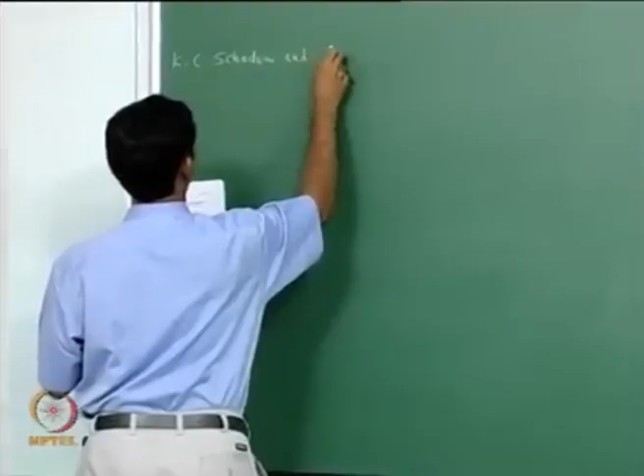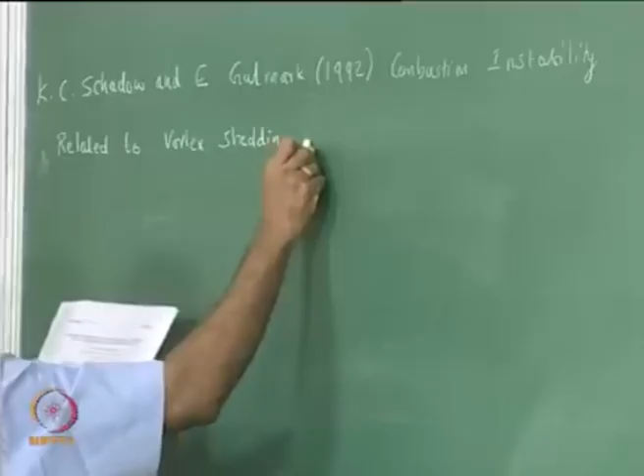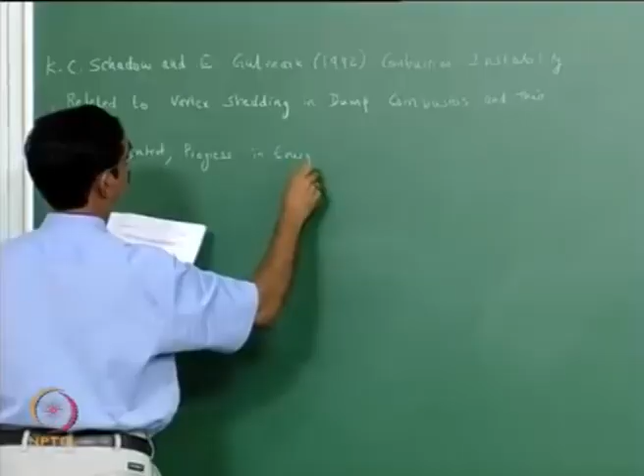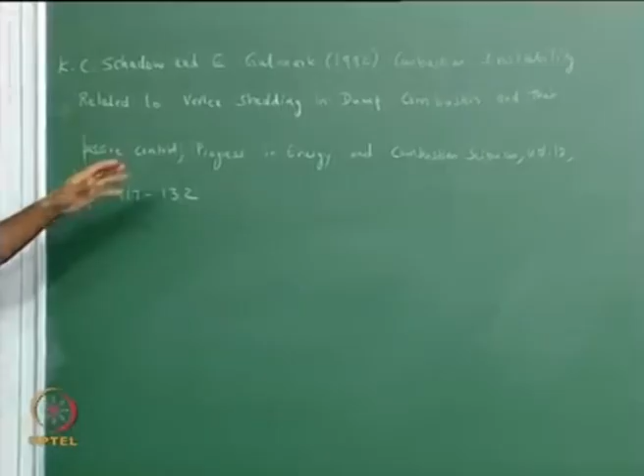So I will give you two nice references. We can download them from ScienceDirect. This is somewhat old, 1992, but it is a very nice reference written by Schadow and Gutmark, titled Combustion Instability Related to Vortex Shedding in Dump Combustors and Their Passive Control, in the journal Progress in Energy and Combustion Science, volume 18, pages 117 to 132.

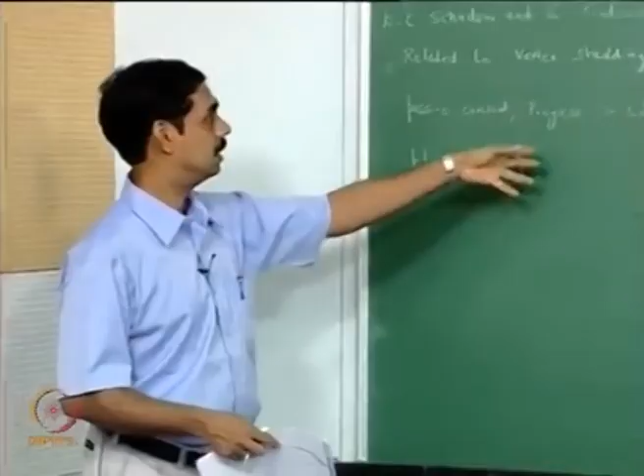I must say a word about this journal, Progress in Energy and Combustion Science. This is a journal which publishes exclusively review articles, and there are no regular papers. Each article gives an overview of the recent development of the subject, in the last 5 or 10 years, and it gives a large number of references. For example, some articles give 50 references, some give 100 or 200. So if you are starting out in a new subject, the first thing to do is perhaps look for a review article on the topic, and in combustion these are all published in this journal. That is a good way to start.

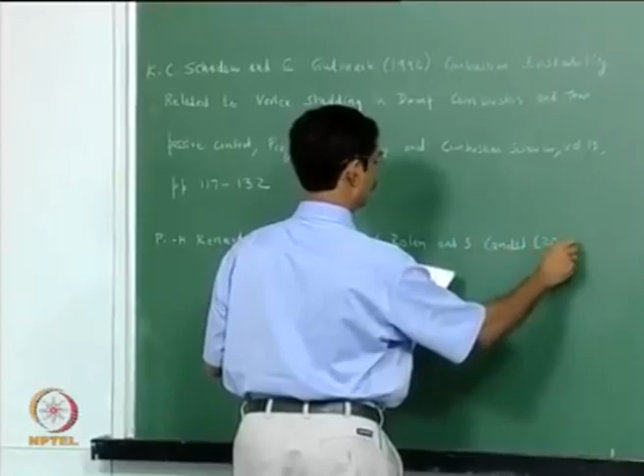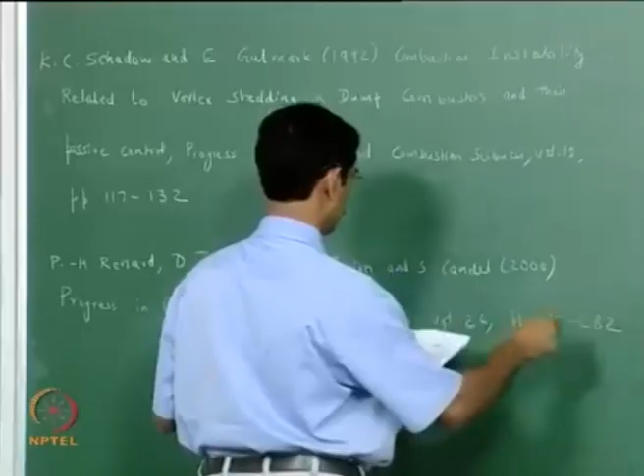So this article gives a good overview of the subject. I will give you another reference, approximately 10 years later, again from the same journal. Dynamics of flame vortex interaction. Here the article is focused on how the flame vortex interaction happens, whereas the other one emphasizes combustion instability itself. So please read these articles.

So I am going to discuss qualitatively what happens, because in the context of a class it is not possible to make a very simple mathematical model. To capture vortex shedding, you have to solve with CFD, and I think that is beyond the scope of the class, but I will give you some highlights of the phenomena. I will first draw a schematic or a cartoon of how a flame would look.

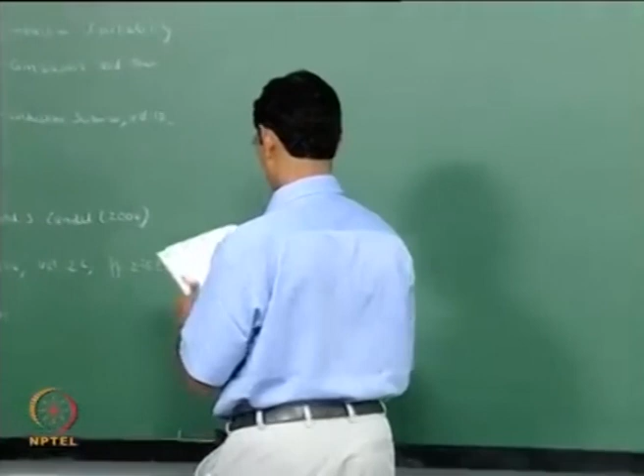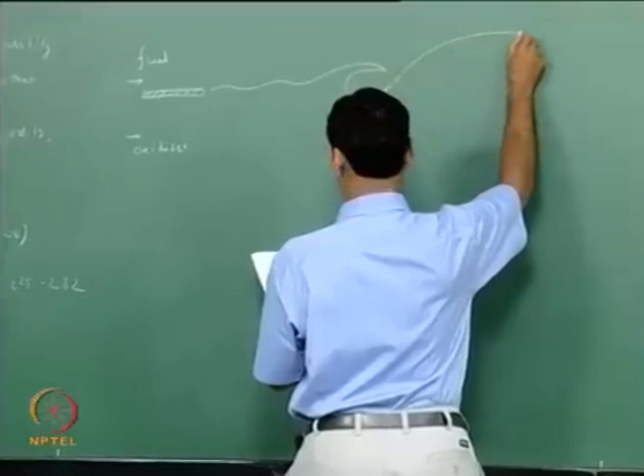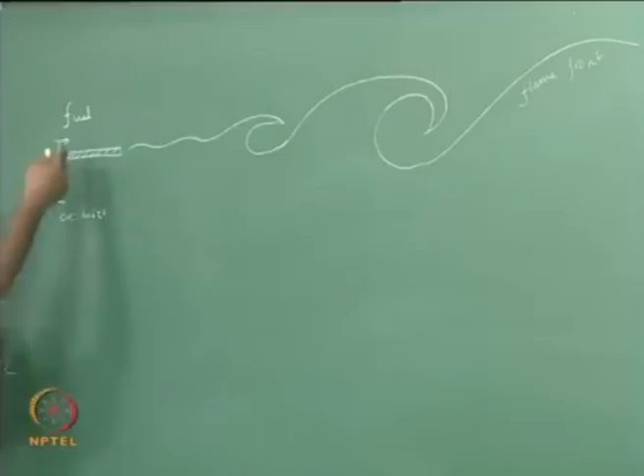So let's say there is a splitter plate here, and you have fuel coming from this side and oxidizer here, and you would have instability waves like this. This would probably be the way the vortex sheet would look, rolling up and so on, and this would be the flame front. And you can also have a situation in the same configuration where you have fresh gases here

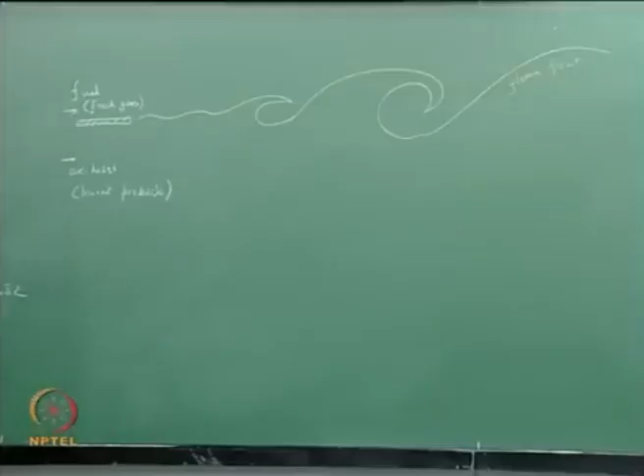and burnt products here in the recirculation zone, and you can still have a similar roll up, and definitely the roll up is a periodic phenomenon. So naturally anything periodic means there is a possibility that it will give rise to fluctuating heat release rate, which, if it can be in phase with the acoustic field, the pressure oscillations, can drive the pressure oscillations. So that is the idea.

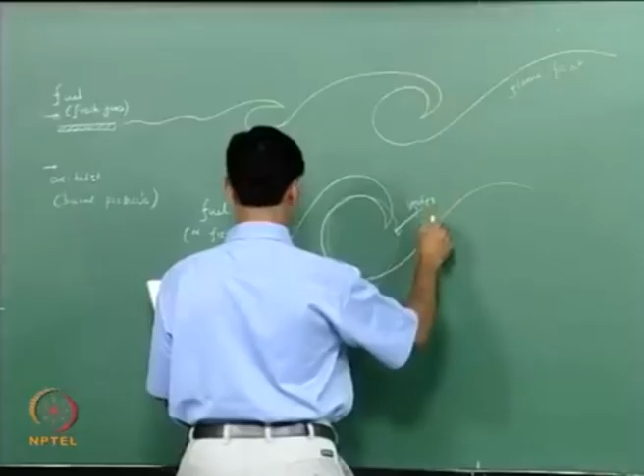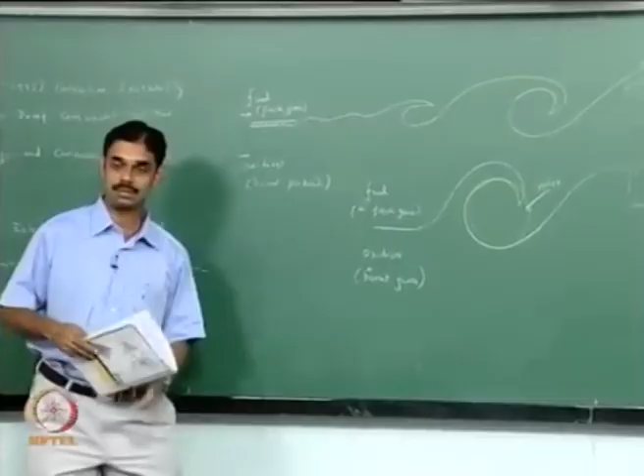Now I will redraw this cartoon, zooming in on this region. So this again is fuel, or it can be fresh gases also. I can have oxidizer here, or I can get the same picture when I have burnt gases, and you have something like a vortex here, and this would be the flame front. So we can imagine that these kinds of situations can arise in a combustor, right? The idea is to have a discussion on what role these things play in combustion instability.

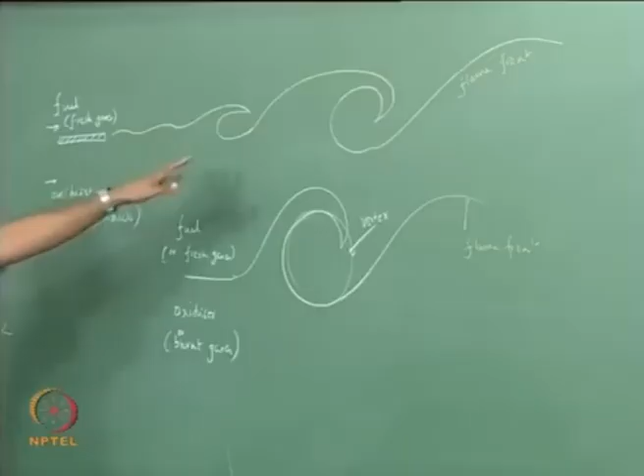There will be a symmetric flame front on the other side. Yes, I will draw that in a second. This is just a very simple situation where you have a shear layer with a splitter plate, like an academic configuration, where they show the vortex roll up. Similarly you can get a flame, and this is just zooming in on this, but in reality, yes, I will talk about it in a few minutes. In reality you can't have a combustor with just a plate; we have to have a combustor to have combustion, and then all those things will be there.

In dump combustors or combustors with bluff body flame holders, vortices are formed in the shear layer between the high speed and low speed streams, let us say at the rearward facing step, or backward facing step, which is called the dump combustor, or in the wake downstream of the bluff body. A bluff body can be used as a flame holder. So the vortex formation is there, and you cannot get rid of it, but neither can we get rid of these generic combustion configurations where the flame is stabilized by some kind of recirculation zone. Why is this recirculation zone necessary to stabilize the flame?

What happens if it is high?

Yeah, okay, so the typical flame propagation velocity, the laminar flame speed, is of the order of less than a meter per second, and even in turbulent flow it will be at most a few meters per second. We want the combustor working with flow at much higher velocities, because the higher the flow rate, the more heat you get out of it. So that is the idea.

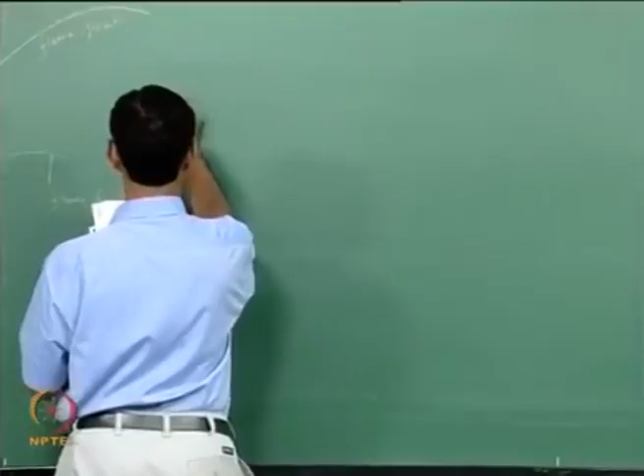So therefore let me show a few typical combustion configurations, so that Derek will be happy that we are looking at practical situations. This is the typical dump combustor. Fluid mechanics people call it a backward facing step, and the combustion people call it a dump. Both are like dumping into a bigger region, that is what it is. So this would be a dump combustor.

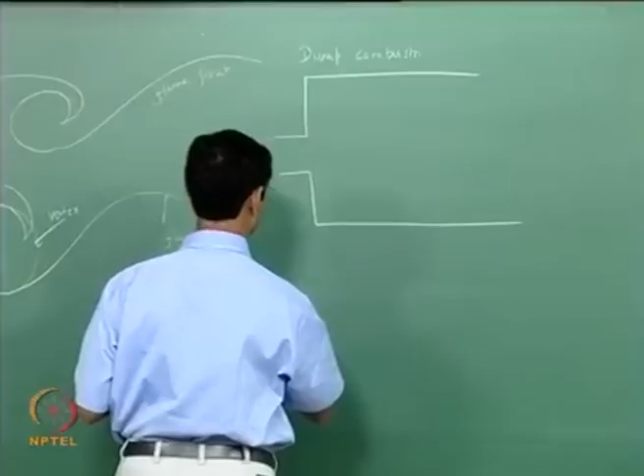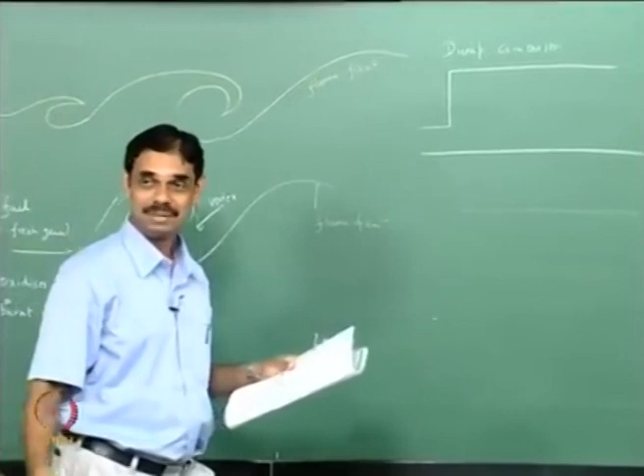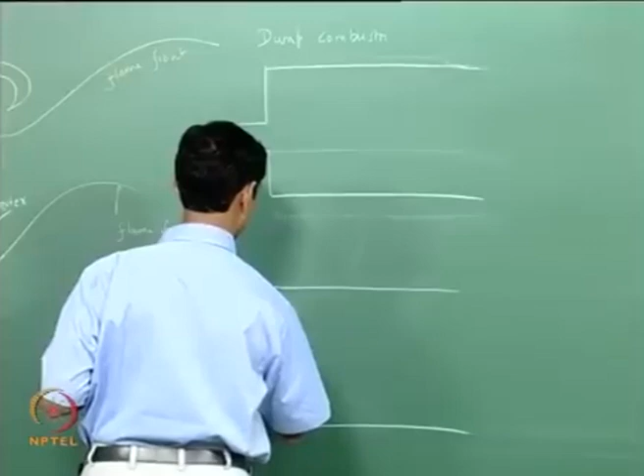You can also have variations of this. If you have a wall like this, let us say I erase this and I have a wall like this, then you have only one side and it will break the symmetry. Such combustors are typically seen in laboratory configurations, but real combustors in the field would be symmetric and usually would look like this. Now I will show you a variation of this. You can have a bluff body here, and that can also stabilize the flame.

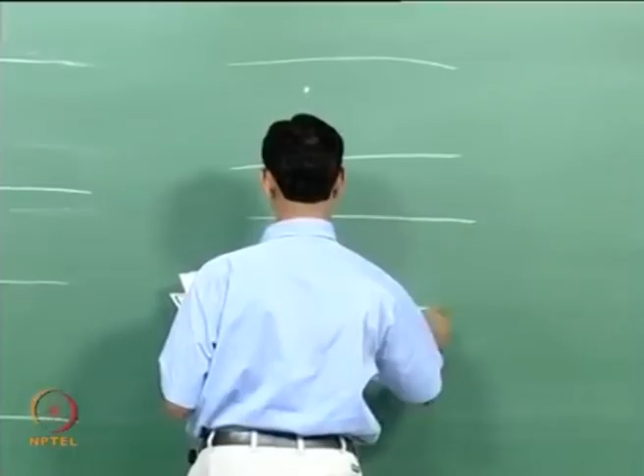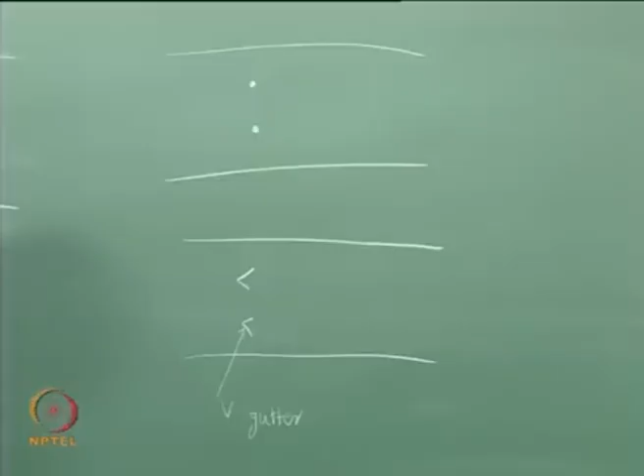Other variations which you would see are some kind of wire or cylinder which will hold the flame in its wake, or what are called V gutter stabilized flames, which are sometimes used in afterburners of aircraft engines. These are practical combustion configurations.

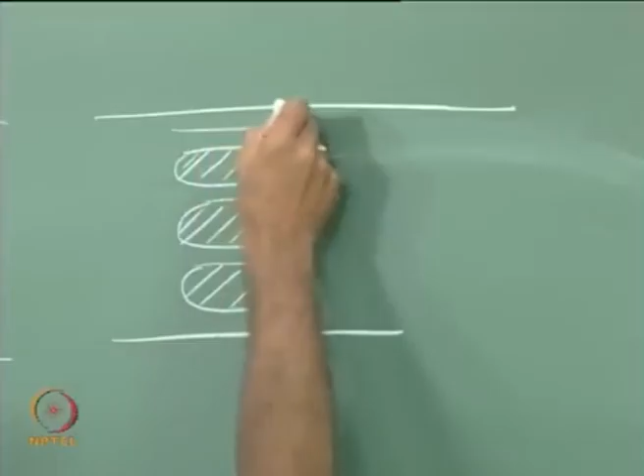You can also have multiple flames being stabilized on some geometry like this. That is another possibility, and you can sometimes see it in domestic heaters. You can also have ramjet combustors which burn solid fuel, the solid fuel ramjet, SFRJ. So sometimes we use a dump there as well.

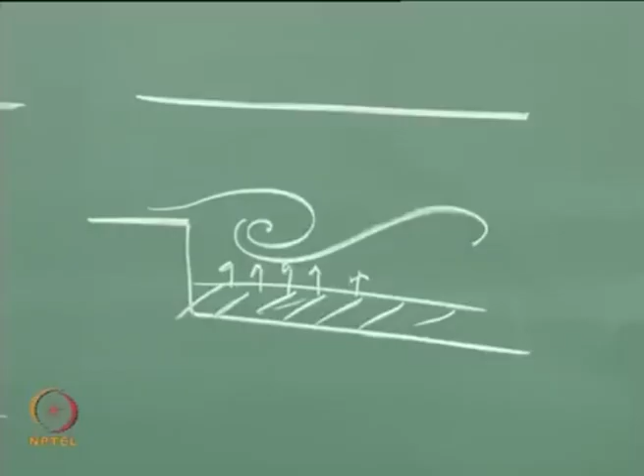So you can have solid fuel burning and pyrolyzing here, and then vortices being formed over that. I am sure you can draw many more configurations. In fact, this paper shows many more configurations than this, but I have just talked about some of the configurations to give you an idea, and you can see those papers for more.

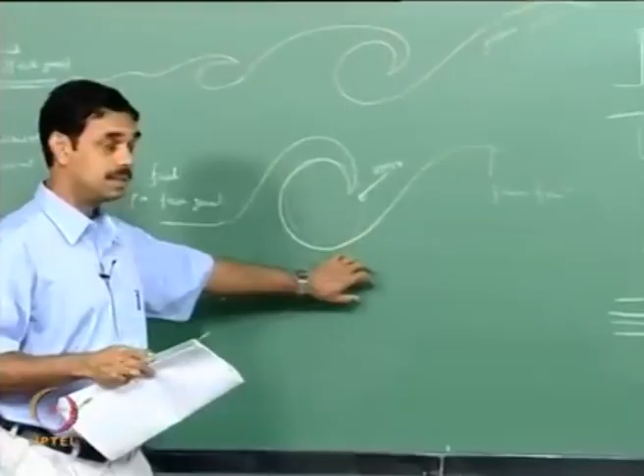I will not speak now about swirl combustors. I will just speak about this vortex shedding and bluff body, but there also there are quite a few interesting instabilities that happen. So now let us take a relook at this picture in the context of these combustors, as Derek was pointing out. I will draw one side, you can draw both sides.

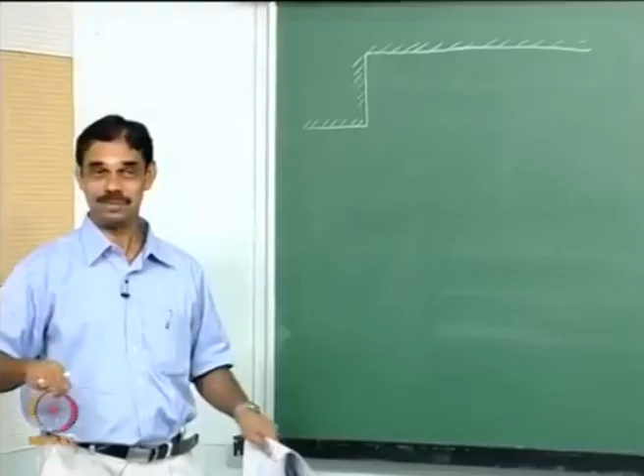This is adapted from the first reference, Gutmark and Schadow. So in reality we have walls, and the walls will also interact with our flame and flow and everything, acoustics, which is something we cannot get rid of. Of course, in the laboratory you can set up a splitter plate in the wind tunnel and have a flame and so on, but in real combustors you have to have walls and they will interact, and we have to worry about the interaction.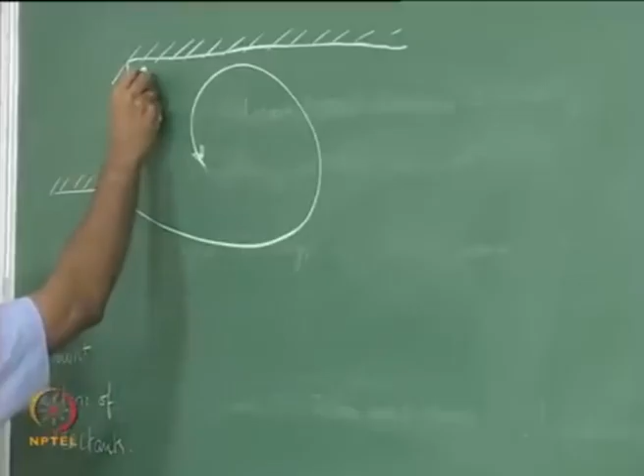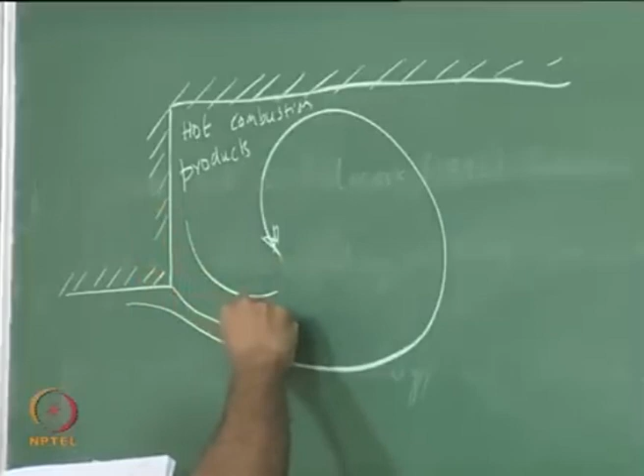So let us say we have a premixed flame coming, so we have unburned mixture of reactants coming here, and we would have some kind of vortex roll up here, and so here we have unburned reactants and there are hot combustion products here hanging around, and that is precisely the reason we have this expansion, so that these hot combustion products will be there, and they will try to get entrained into this, and there will be some kind of interface here.

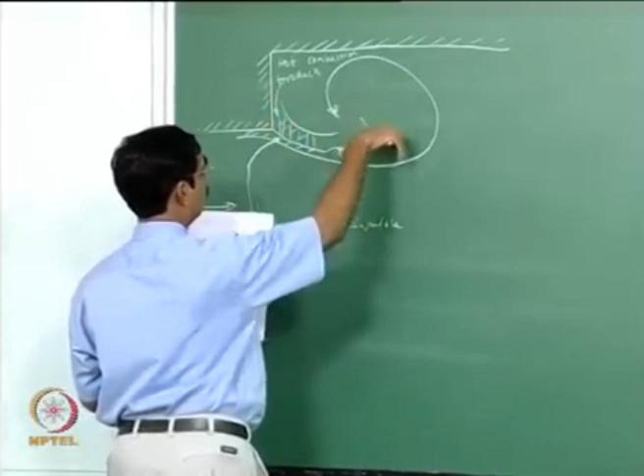So this unburned mixture of reactants will try to get in this way, and the hot combustion products are trying to come in here, and then there will be an interface, and then you will have a pool of mixture which can actually burn in this vortex. Okay, so that is like a cartoon or schematic, and the exact details can change depending on how far the walls are, what is the step height and so on, but this is a basic schematic of the situation that can prevail.

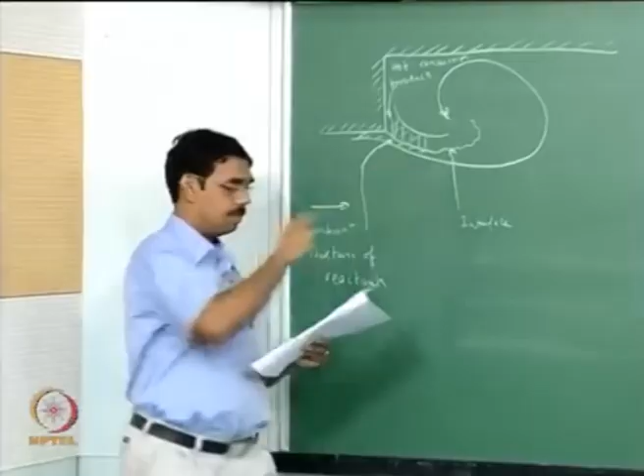So clearly you can see from this that the vortex structure can have a significant influence on the combustion. In the early phase you have unburned mixture on one side and the hot combustion products on the other side, and then you do not have intense mixing and burning, but as the turbulent structures develop and the fine scale mixing happens in the interface, you can have fine scale mixing and burning. So you have a roll up, but in reality that is not the only thing.

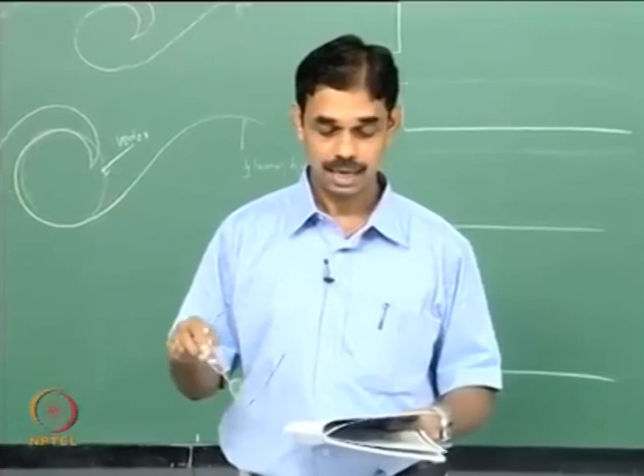You will have interaction between vortices because the shear layer has an instability that will shed at some frequency. Those waves will have some preferred mode of excitation and so on, and then vortices will be shed, and these vortices will actually merge, and then you will probably end up having a lower frequency of the bigger organized structure, and of course this will be obstructed and severely interfered with by the walls, so that the situation will be quite different from a flow from a jet. It will have some similarities, but the wall is interfering for sure, and a large interface between the fuel air mixture and the hot products will develop, and there will be fine scale turbulence which causes entrainment, and so eventually adequate numbers of radicals will diffuse or mix into the stream, and there will be a pool which will suddenly burn.

So this phenomenon will be quite periodic, and it happens cycle after cycle, and of course if you studied the Rayleigh criterion, which says that if heat release rate is in phase with the acoustic pressure, then you will have acoustic driving. So here there is a delay: the mixture comes in here, comes here, and at some instant it burns very vigorously, then again this phenomenon happens, and all the things that we studied about how the acoustic model has to be developed will again apply here, and this time delay between the fluctuations here and the heat release will clearly affect how the reactants are going to burn, whether they are burning in phase or out of phase, and therefore whether they are going to drive the instability or damp the instability.

And researchers have said that, I mean, this is the situation I have drawn for gas phase combustion, but even if you are having spray combustion, the spray will be entrained into the vortex, and of course the situation will be much more complex. If you buy a spray, people say it has an average diameter, but average diameter is not the only thing. You have a diameter distribution, and you have all kinds of droplets, small droplets, large droplets, and the small droplets will behave in one way: they will go very well with the structure, they will almost behave like gas. The large droplets will have heavy inertia, so they will not follow the flow exactly.

Similarly, if there are acoustic oscillations in the combustor, the small droplets will follow the acoustic oscillation very well. So if you have a 10 micron droplet at around 300 hertz, it will fluctuate at, I think, 80% of the acoustic velocity, but if you have a 50 micron droplet, it will only fluctuate at 10% of the acoustic velocity.

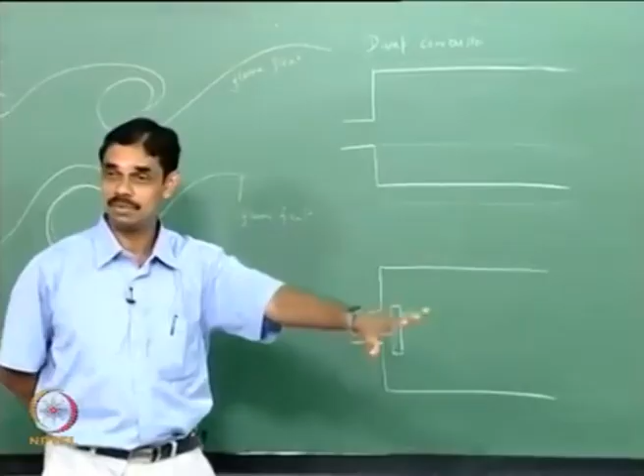Now I just want to give an idea of how I can get such a combustor to work. Ideally you do not want the combustor to pulse, but if you understand how it pulses, then there may be a possibility to make it not pulse. This is a design which is often used in tunable pulse combustors. So you can make a pulse combustor and you can make it pulse at any length.

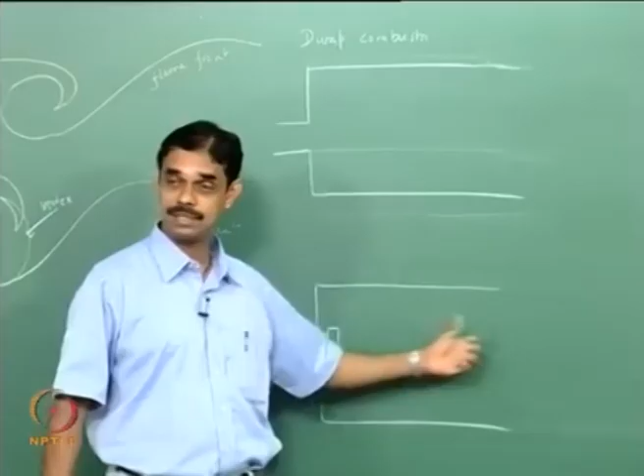What you can do is, if you can move this bluff body back and forth, as you come close the velocity here will increase, and as you push the bluff body forward the velocity here will decrease. Typically these things shed at certain Strouhal number modes, which means the Strouhal number will be constant at some number, so if you increase the velocity, the frequency of shedding will increase. If you pull it back, the frequency will go up, if you push it forward the frequency will come down. So if your frequency is going up and coming towards the frequency of the acoustic oscillations in the duct, that is, if you have certain preferred duct frequencies, the natural modes, and you are coming towards that, then this vortex shedding will suddenly lock to the acoustic oscillations, and then this instability can happen.

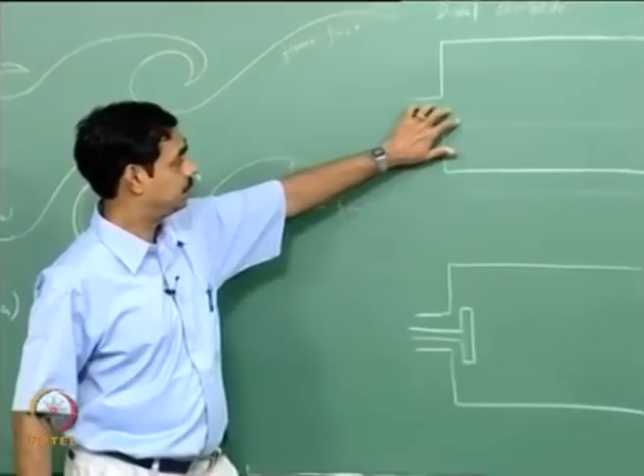But if you are going away, then the chances of these things coming closer are lower. It does not have to match exactly, because these are nonlinear phenomena, so you just have to come close. If both frequencies are going away from each other, then you are actually detuning the system, and you will not have oscillations. The same kind of thing happens here. You can't tune at a given velocity, but at certain velocities the vortex shedding frequency may come close to the frequency of the combustor, and then both will lock to each other.

So that is how, in a crude sense or in an intuitive sense, you can understand the instability mechanisms. Here, if you want to remove the instability, and there is instability at some flow configuration, you can change the inlet area and change the speed, and therefore you will change the frequency of the hydrodynamic instabilities, so you can make it go away from the acoustic oscillations. So this is some intuitive explanation of how a pulse combustor, or a combustor of this sort, pulses.

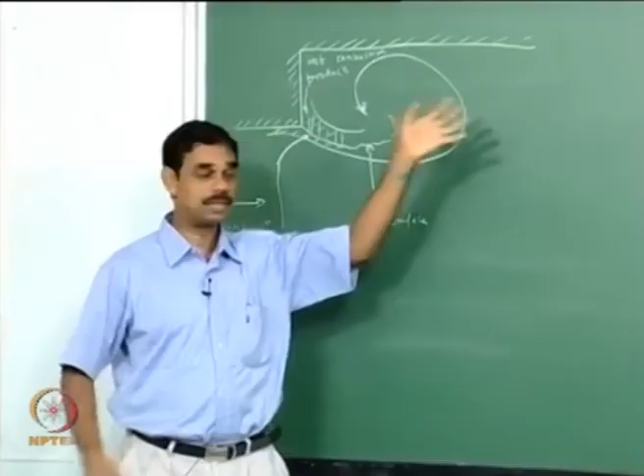Yeah, in the 60s and 70s people came up with models for how these coherent structures appear fluid mechanically, and now there are calculations. So you have a CFD model for all these things, which you can couple, or you can have a full compressible solver which will capture everything if you are rich and you have big, fast computers. But if you don't, you can solve for the hydrodynamics separately, and you can have some asymptotic expansion and then input this into the acoustic solver and do a coupled solution. So people have solved for it.

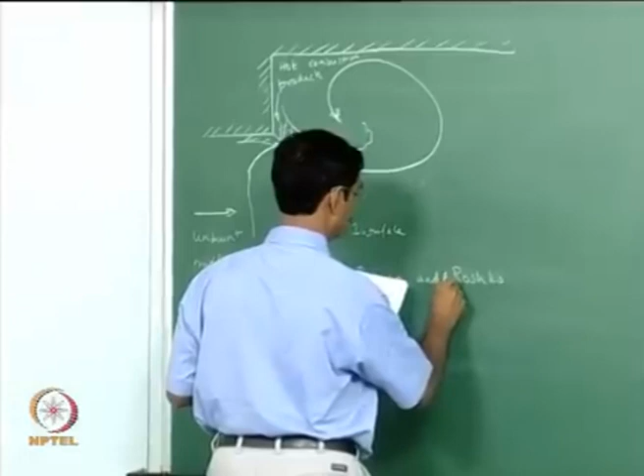The concept of large scale structures was first advocated by Brown and Roshko, 1974. JFM, Journal of Fluid Mechanics, volume 64, pages 775 to 816. There is also another very nice review article of this whole concept, by Ho and Huerre,

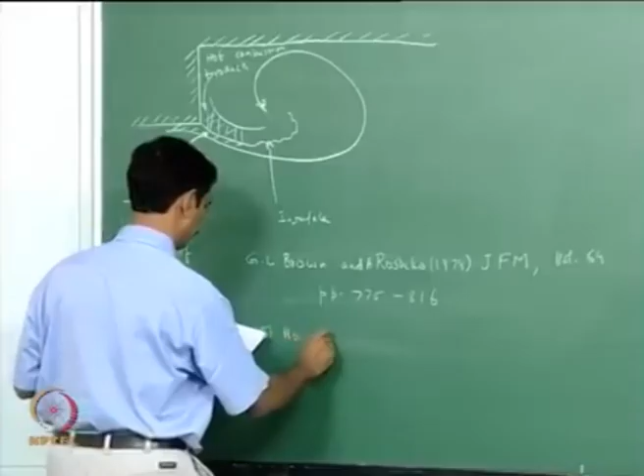Patrick Huerre, in Annual Review of Fluid Mechanics, volume 16.

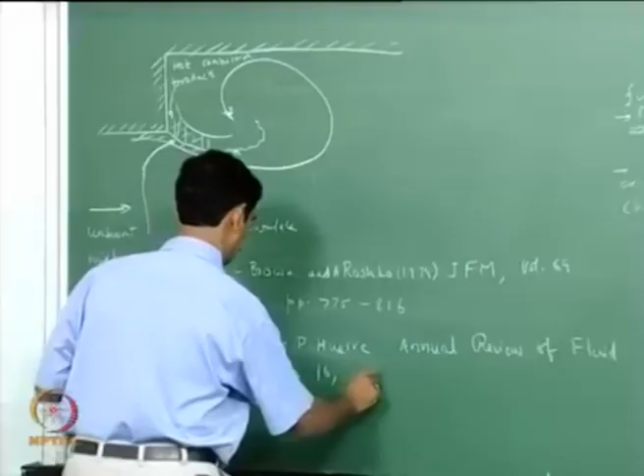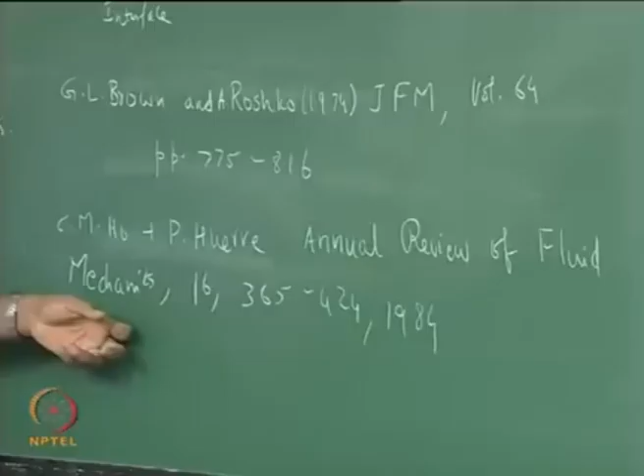This is also a very prestigious journal. You can't just send articles, they will have to invite you. So if you are a big shot, a very acclaimed person in the area, then you will get an invitation to write an article in Annual Review of Fluid Mechanics. And again, like the earlier journal I mentioned, this has only review articles and no regular articles. When a subject reaches a certain level of maturity, the big shot in the subject will be asked to write a review article, and this is a review article about this concept of coherent structures.

So based on laboratory experiments with low Reynolds number, so this is a fluid mechanics experiment, not really combustion, low Reynolds number experiments of turbulent flow, it was shown that the shear layer initially develops instability waves in the initial region, and then when these waves reach a certain energy level, they roll up into vortices, and so there will be an initial vortex shedding frequency, let's call it Fi, which is also the most amplified frequency, and it is often determined by characteristics such as the shape of the velocity profile, turbulence in the profile, initial shear layer momentum thickness, and the jet exit velocity.

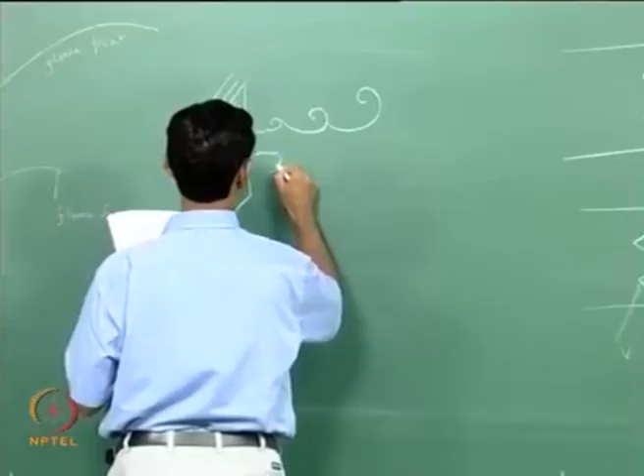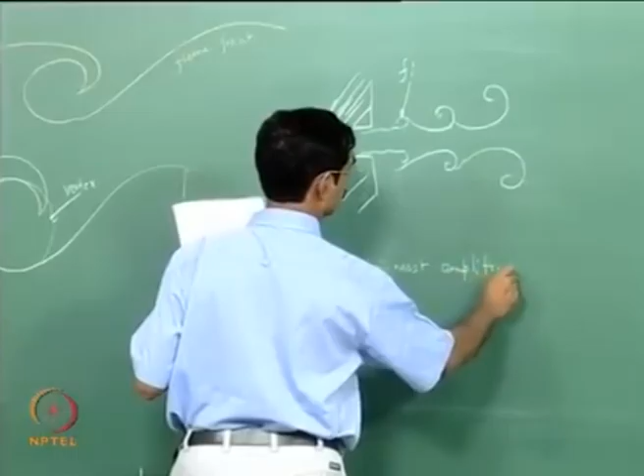And so let's draw this concept. So you will have these instability waves, and they will start rolling up. And initially there will be a Fi, okay, and this Fi is the initial vortex shedding frequency at the initial region. Fi is the most amplified frequency. So it depends on the characteristics of the exit velocity profile, that is the velocity profile here.

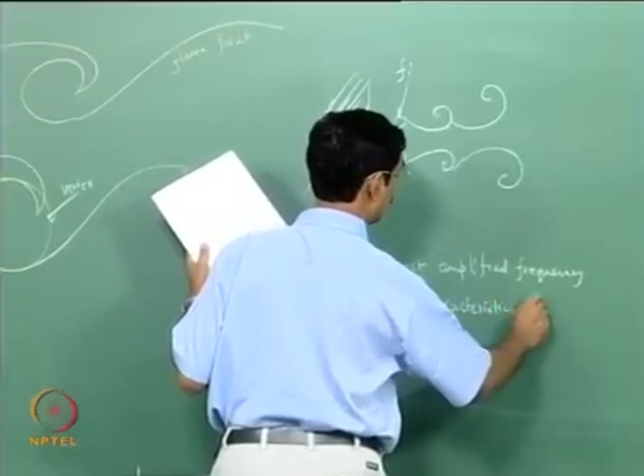And those would be, let's say, the shape, the turbulence levels there, theta naught, the initial momentum thickness, also of course u naught, the jet exit velocity.

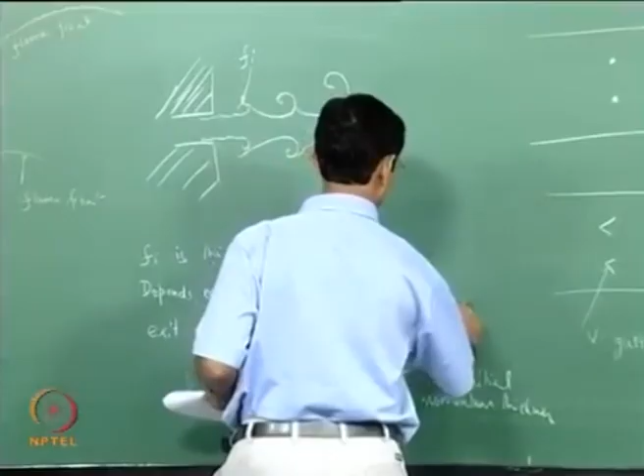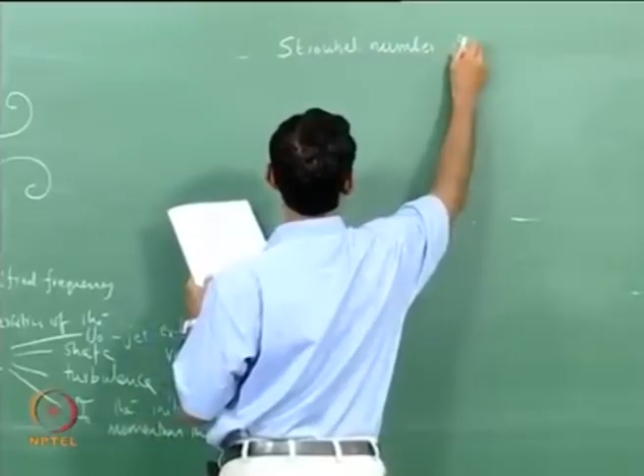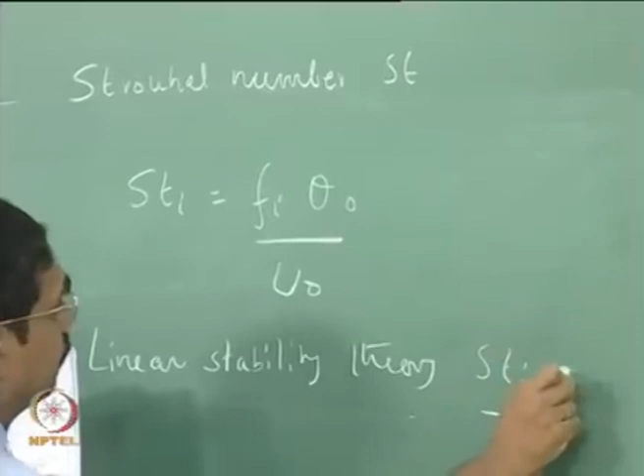So we can always look for scaling, just like we have a non-dimensional number like the Reynolds number to look at how viscous forces scale. So similarly you can also have a Strouhal number, denoted by St. So Sti equal to Fi theta naught over U naught, and typically people have done linear stability theory and found that from linear stability theory Sti equal to 0.017, and the reference would be Michalke, JFM volume 23.

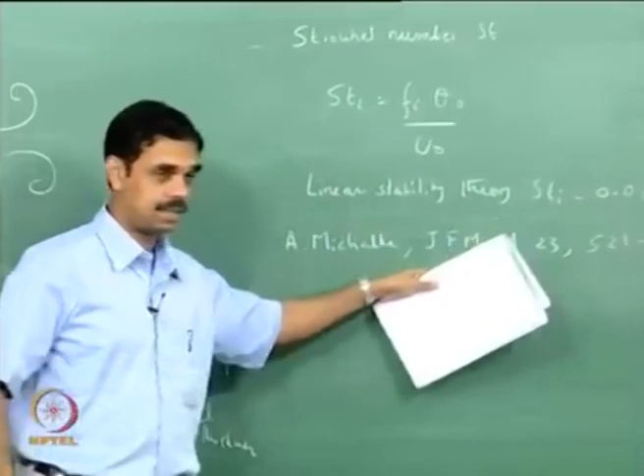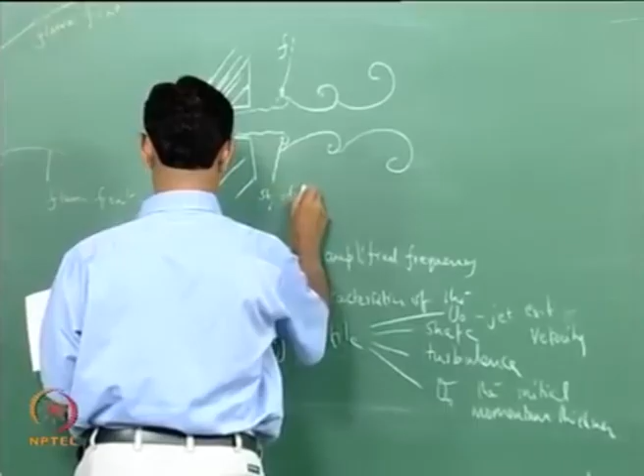So typically JFM has thorough articles which are quite long. You do not see a 2-page article in JFM, you see 20-page article or 40 or 50-page articles in JFM, which will give comprehensive treatment. So let us indicate this in our picture here. So this Sti equal to Fi theta naught over U naught equal to 0.017.

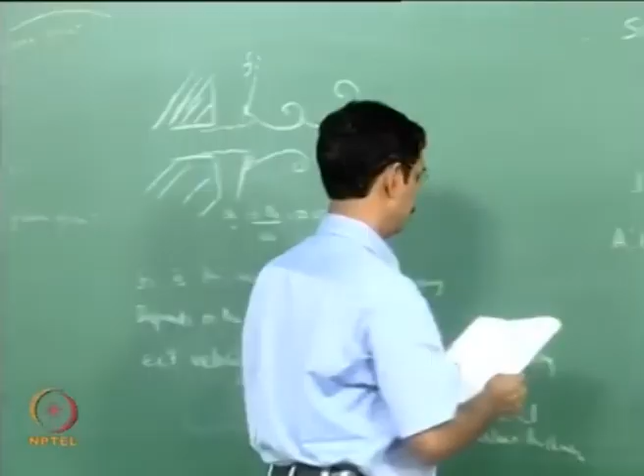Now the initial vortices, many will be shed, but they grow and they merge and are convected downstream. So vortices merge, grow and are convected downstream. So you can imagine that when you have vortex merging, what happens to the frequency? Will it come down or will it increase? It actually depends upon whether they are merging in phase or. Let's say they are merging. In phase means it will come down. Yeah, if you have 10 vortices and they merged into one vortex, then naturally it will come down, right? So the frequency will come down.

So due to merging and entrainment, the shear layer will also start spreading, because when this happens, it is going to entrain air from the surroundings, and then this vortex structure is going to get big, and the vortices are merging, so that also makes it big, and the frequency associated with the dominant large vortices decreases. Okay. So in the shear layer of a jet, several vortex interactions can occur between the initial separation of the shear layer and end of the jet potential core. So let me write this.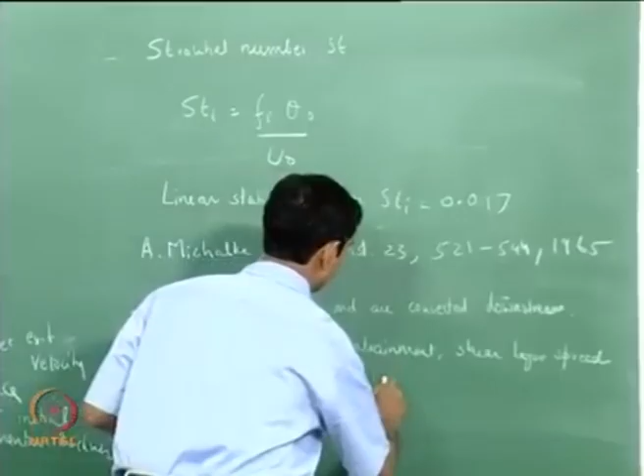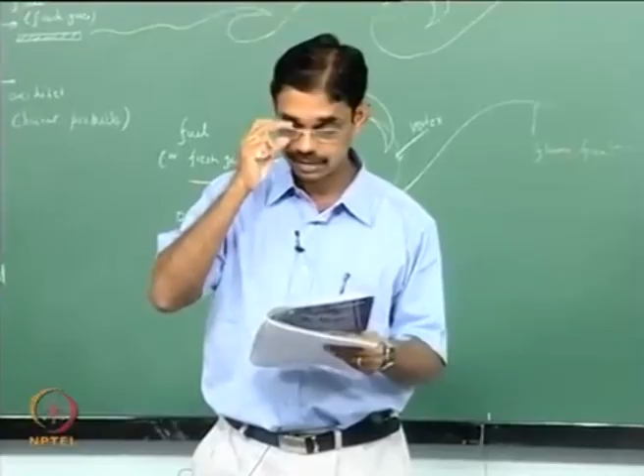So due to merging and entrainment, the shear layer spreads and the frequency of these larger vortices decreases. So the shear layer will therefore be characterized by several instability frequencies associated with different sizes of the vortices, and in the region at the end of the potential core, by then all this would have merged into a big vortex, and that is governed by what is called the jet column instability, and the vortex fluctuations in this region will have another characteristic frequency which we will denote as Fj. Let us say if this is the end of potential core, here we will have some frequency Fj, which is typically the second or the third subharmonic of the initial shear layer frequency. You will have a certain frequency Fi, and Fj would be Fi divided by 3 or something like that typically.

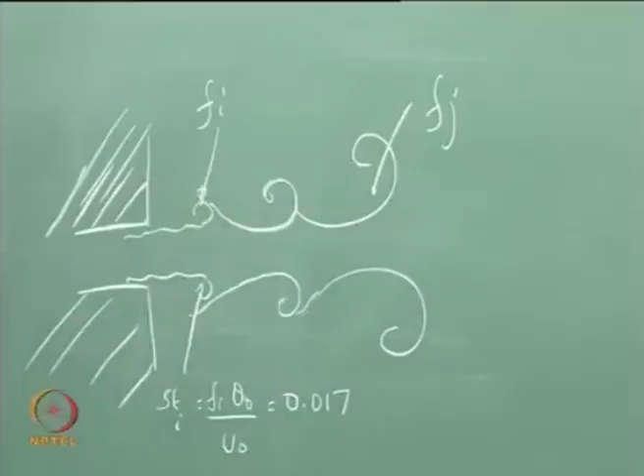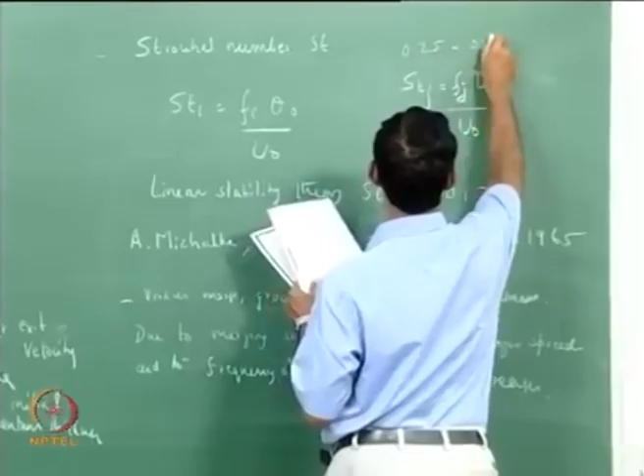And this frequency scales with some other variables. So Stj is this frequency which is at the end of the potential core, and it scales with the diameter of the jet and u naught, the exit velocity of the jet, and typically you see Stj in the range of 0.25 to 0.5.

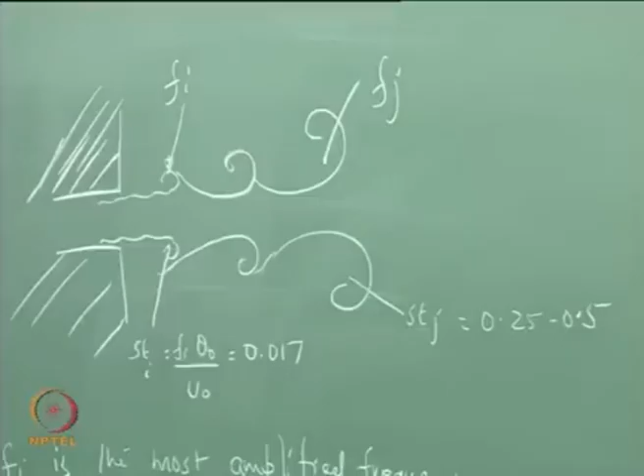So you start off with Fi and you end up with Fj. Fi scales with momentum thickness and the mean velocity at the exit of the jet, whereas Fj actually scales as Stj equal to Fj d over u naught.

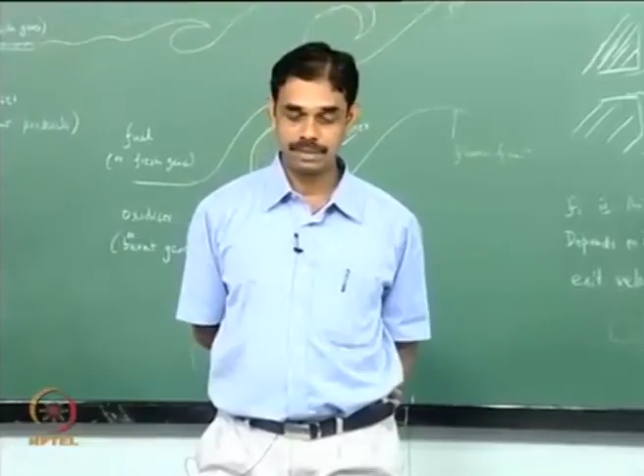If you look from a combustion point of view, we want mixing either between fuel and air, or we want to promote mixing between the hot gases and the cold gases, and that is when our combustion will happen. The large scale structures are beneficial for the enhancement of large scale mixing or bulk mixing, that is, you take this fluid and mix with that fluid. Nevertheless, it may not really enhance fine scale mixing or molecular mixing, and only if mixing happens at the molecular level will you have combustion. Otherwise you still have big pockets of fuel and big pockets of air, and that is not enough. You have to have mixing in the small scale.

So in the presence of large scale structures, we need to transition to fine scale mixing, and that is often initiated by the braids of vortices, where high strain rates between the high and low speed streams exist, that is here, in these braids. However, the initial fine scale turbulence is limited only to this region, but it is conjectured that fine scale turbulence is abruptly enhanced during the roll up of vortices. When the vortex is rolling up, suddenly this fine scale turbulence increases, and therefore fine scale mixing increases, and this suddenly causes the reaction to occur, and this is a periodic phenomenon.

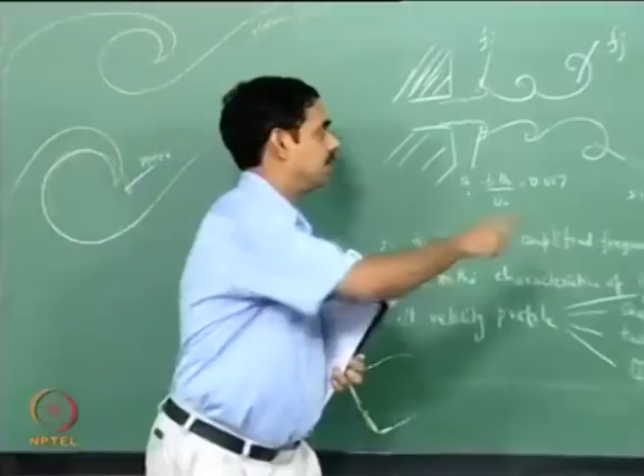With the two Strouhal numbers, if you see a spectrum of a jet, the noise, it will have many frequencies, it is not just one particular thing. So you will have a frequency associated with the initial layer and a frequency at the other layer, and you will see a kind of broad band spectrum, but with some preferred frequency. You will still see a prominent peak there. So you will see a lot of frequencies, but some frequencies will be preferred.

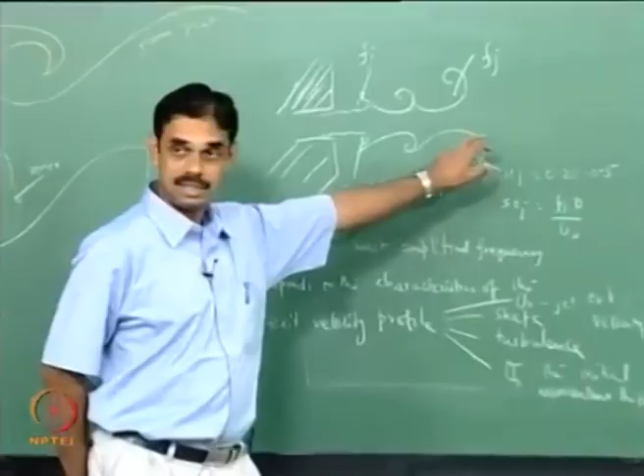So where do we use Strouhal number, like does a particular Strouhal number mean more mixing? You can't quite say that. Strouhal number is about receptivity. If you want to force with acoustic oscillations, and you force at this frequency, then you have coherent structures coming, and there is a preferred frequency at this Stj. If you send the acoustic wave corresponding to that, this coherent structure will get very organized, and if you look at the spectra you will get a very sharp peak. If you are exciting here, you are amplifying the waves here. So it's about receptivity actually, not just mixing.

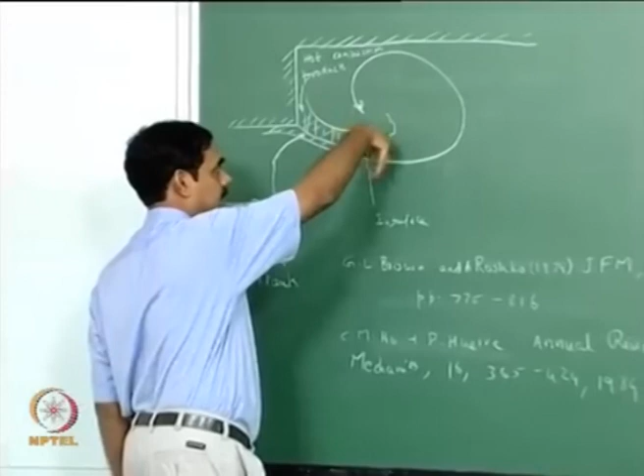Once you have the coherent structure, it leads to this bulk mixing, and then if the high strain rate is available, which happens during roll up, then you can have this fine scale mixing and combustion. So that's why it doesn't really start burning right from the beginning. It just gets in, and then it rolls up, and then it bang, it burns, and then again the same thing happens. So it happens in a periodic way. People have taken high speed movies and have seen this. Does it answer your question? It's about this jet responding to certain frequencies. It has certain preferred frequencies, so if you excite at those preferred frequencies it will respond.

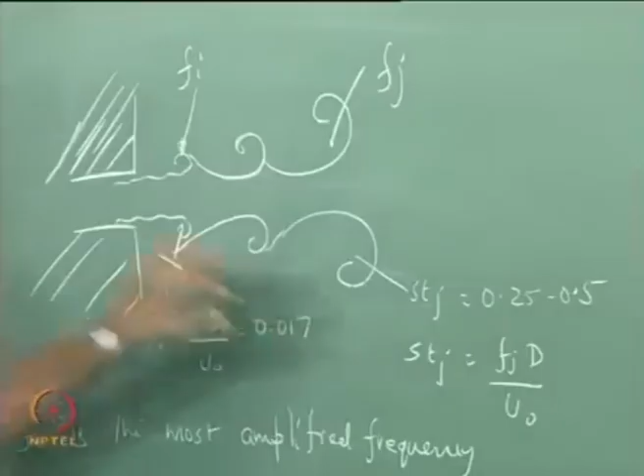So can we say Fj is greater than Fi, or Fi is greater than Fj? Yeah, Fi is greater than Fj. Then how is this Strouhal number Sti less than Stj? Because this is non-dimensionalized with theta naught, which is very small, that is the momentum thickness. Here it is with d, which is the jet diameter. Does everybody know what the momentum thickness is? Just by definition, if you define it that way, this is the way it scales.

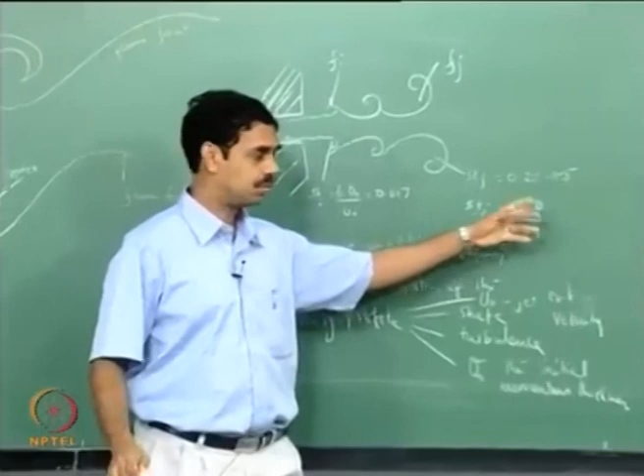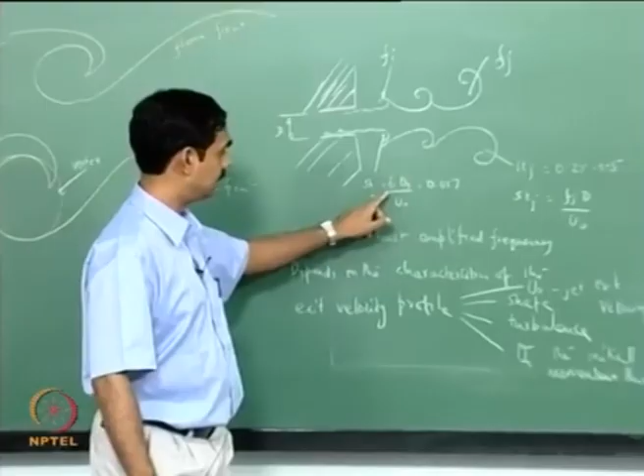If you do experiments with several different diameter jets and collapse all your frequencies, all your data will merge if you non-dimensionalize this way and not any other way. Here this frequency will collapse in different experiments if you non-dimensionalize with momentum thickness. Somewhat similar to boundary layer Reynolds number and free stream Reynolds number, we use two different lengths. Yeah, correct. So here we use different time scales, theta and d. You can rewrite this as f divided by u over theta. So f is like 1 over time scale, this is another 1 over time scale. Okay, any other questions? Okay, so I think it's a good place to stop.